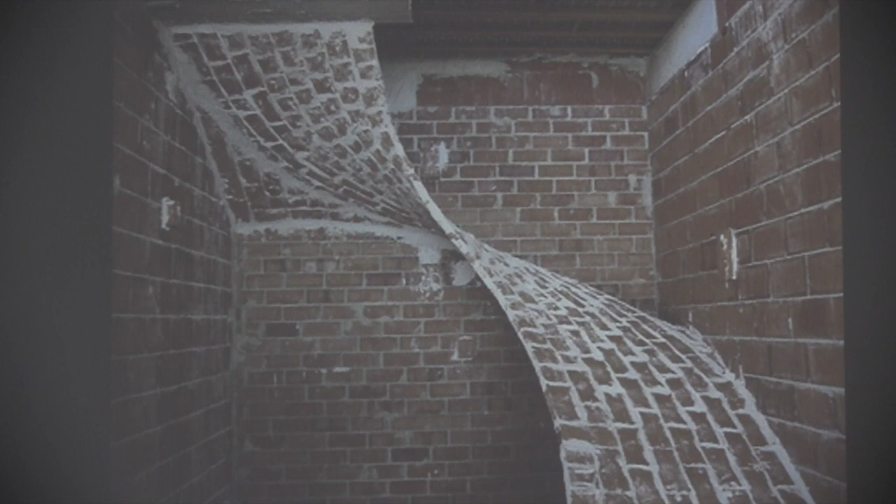This is an example of a vernacular house. We'll see this example here for some stairs in the construction process. Extremely resistant and stable vaults with barely any thickness. Once again, we witness the evolution of a system that is cheap and extremely low-tech. Here we're seeing some of the examples. This is the National Museum of Industry near Barcelona. And these are more contemporary exercises with the same approach.

Early on, at the turn of the 20th century, a master like Antoni Gaudí was working with the trencadís. The trencadís is a colorful and decorative pattern made out of recycled ceramic pieces that resulted in a cheap and colorful finish in his architecture, including sometimes in buildings for the aristocracy of Barcelona, like the Milà house.

Gaudí was a key architect of modernism in Spain, and his care for the details, the rich use of the materials, the almost impossible array of forms and colors are quite visible in the way his works were finished with these patterns of irregular and colorful ceramic pieces. The trencadís was very often taken from residual pieces or remnants of other works, and it became very popular with Gaudí, but it certainly belonged to a centenary tradition in most areas of Catalonia, Valencia on this coast, and the Balearic Islands in the Mediterranean.

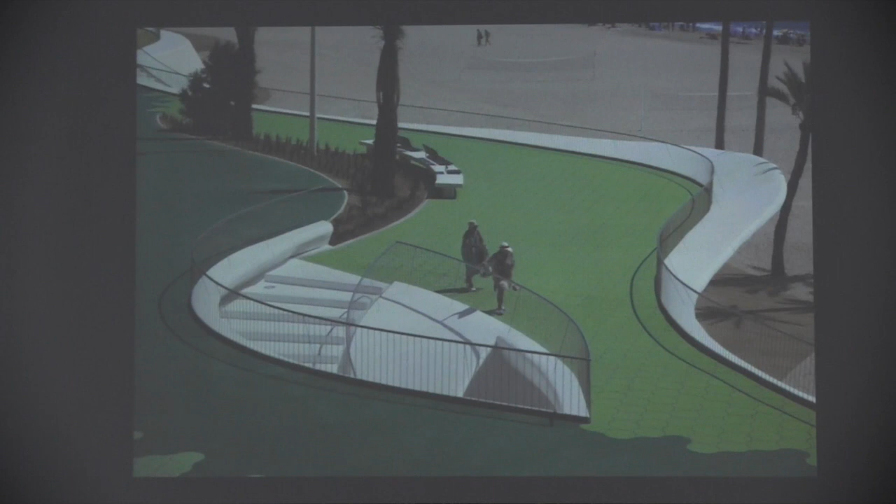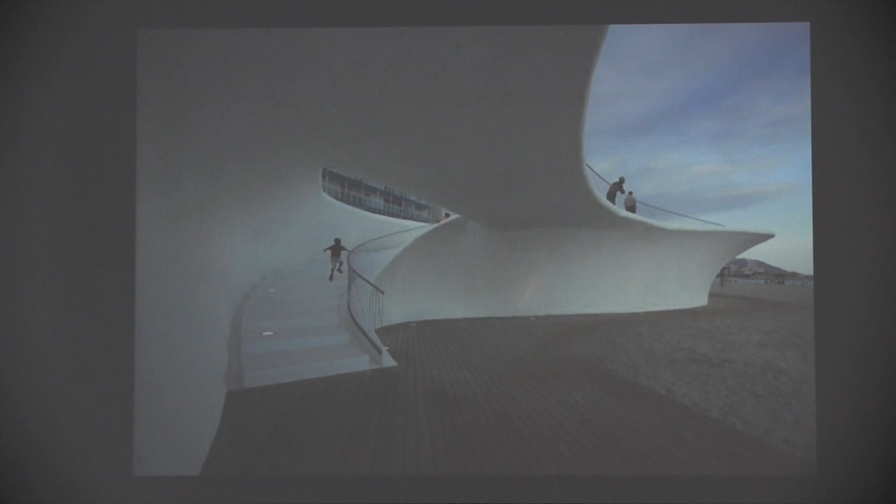The concrete retaining walls were inspired by the dunes of the sandy beaches, and along its changing landscape, a series of complementary functions, like accesses to the beach, seating areas, bicycle parkings, showers, etc., were organized. The use of the colorful ceramic pavements along the intervention recreated an artificial landscape that confronts the natural one of the beach.

In the second category, the category of artistic approach, I would like to show a very particular piece that can be considered very relevant, a space halfway between art and architecture. You probably know Barceló, the artist born in Mallorca. He was asked in 2007 to design a proposal for the interior of one of the main chapels of the Gothic cathedral of Palma de Mallorca in Spain, the Balearic Islands.

Such a big commission was not new to one of the most extraordinary architectural pieces of the Gothic period in the island, because the cathedral is very particular: it contains a number of collaborations, like this sort of floating element on top of the main altar made by Gaudí himself.

Miquel Barceló proposed a dramatic 3,000 square feet ceramic solution for one of the lateral chapels that represented parts of the parable of the loaves and fish from the Christian gospel. What he did is to wrap the entire Gothic space with this permanent installation that is completely narrative in the way he explained this parable.

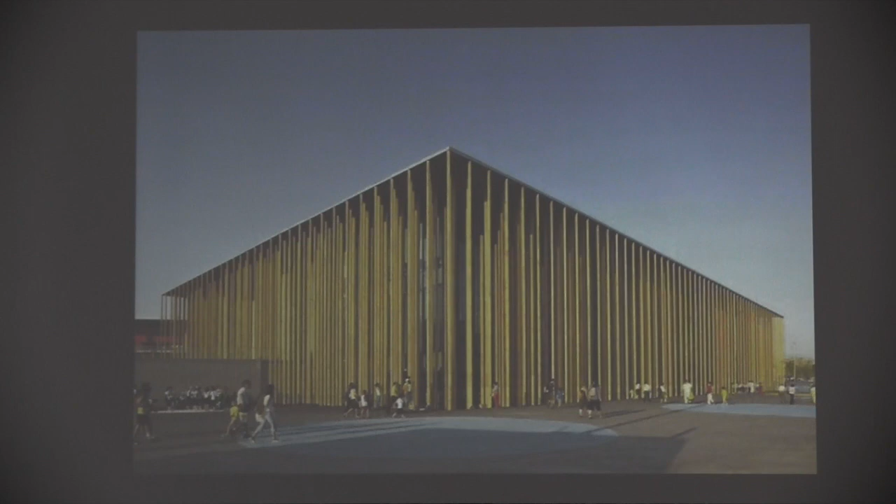And finally, the Spanish Pavilion in the Expo 2008 in Zaragoza, in Spain, by Patxi Mangado. You probably know this building as it's been published very thoroughly. The building was organized as a basic container with a surrounding forest of columns that were entirely cladded in a ceramic skin. The main idea was to create some sort of hypostyle perimeter, a buffer zone that would hide the glass box inside, again, from direct sunlight. Here we have the plan.

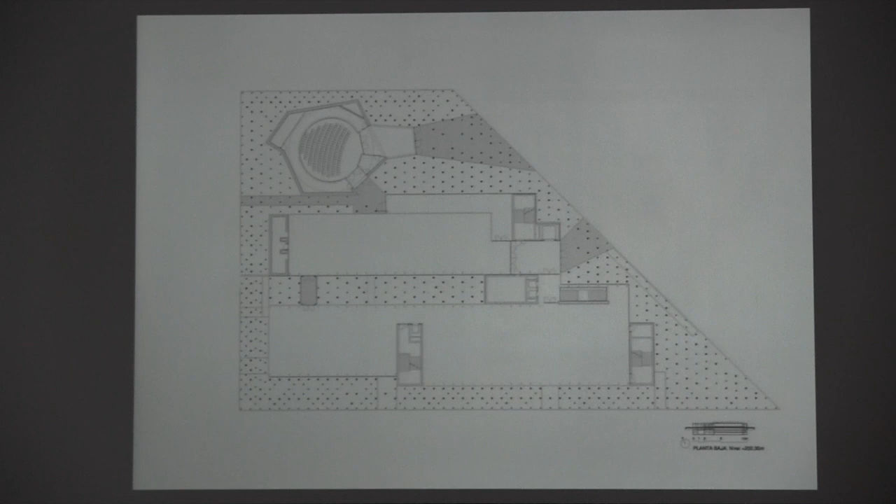Besides this, some of the areas outside, especially those where visitors would have to line up to enter the building, had columns interacting with water to favor the evaporation process and therefore cool down the temperature near the building. This approach happened to be a success, and the building stands today as one of the most celebrated projects of the Expo and also of Mangado's career.

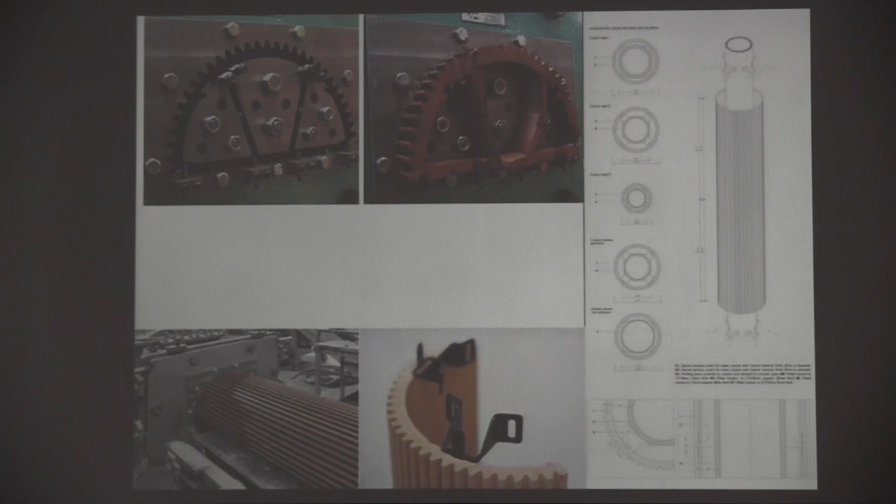I would like to conclude this quick overview with a praise of the ceramic material, because it belongs to the past, but it also belongs to the present. I have tried to illustrate very quickly that it's also possible to make it part of the future, as ceramic solutions bring the possibility of working with an inexpensive material that has infinite possibilities, whose application today, more than ever, makes special sense, as it seems to be a perfect material for where tradition and sustainability can be combined with a contemporary abstraction and a sustainable approach to the way we use energy.

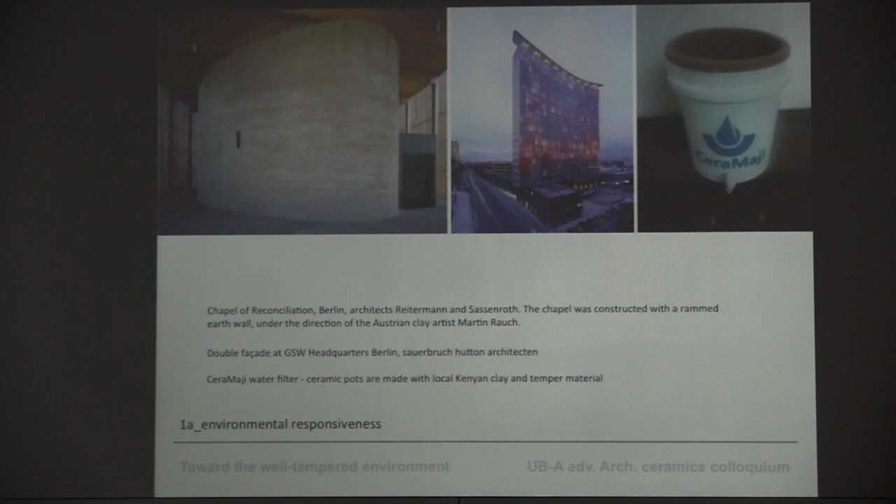Environmental responsiveness played a great deal in the formation of this project. The references I would bring up are three things in relation to architecture. One is the Chapel of Reconciliation, done by an architect named Peter Sassenroth. He turned a very small budget into a very beautiful building, I think. It is essentially a rammed earth composition made up of the remnants of a cathedral that was blown up. It had sat in the space between the walls.

The building in the center is one that I spent many years working on in Berlin. It's called the GSW headquarters. This building was like a machine for moving air, if you like. It was very finely calibrated to natural air movement, and in a sense there's a kind of correlation with the way this project moved.

The third one was a very small kind of almost detail, if you like, but a water filter designed for townships in Kenya. This was actually done at the University of Alberta in the medical faculty, and they discovered a solution of using colloidal silver as an antibacterial agent, which would allow that water filter a life of about fifteen years. And more importantly, it actually started an industry. So this idea that you can seed an industry, I think, is a very interesting idea. It's a great thing.

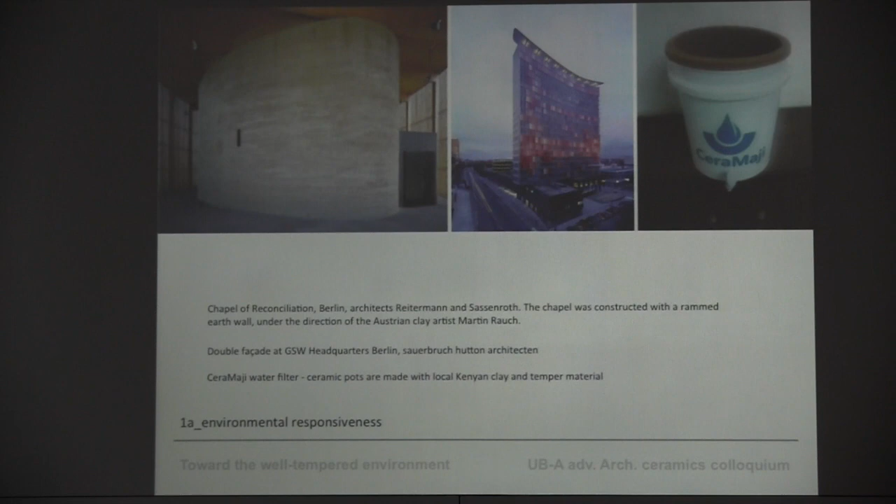So, moisture flow through assemblies. This idea that every building, or every building material, would have a perm rating - that we actually analyze an assembly on how moisture penetrates through it. It's very interesting to look at the positioning of vapor barriers, or the types of vapor barriers, in building assemblies. And that was one of our starting points.

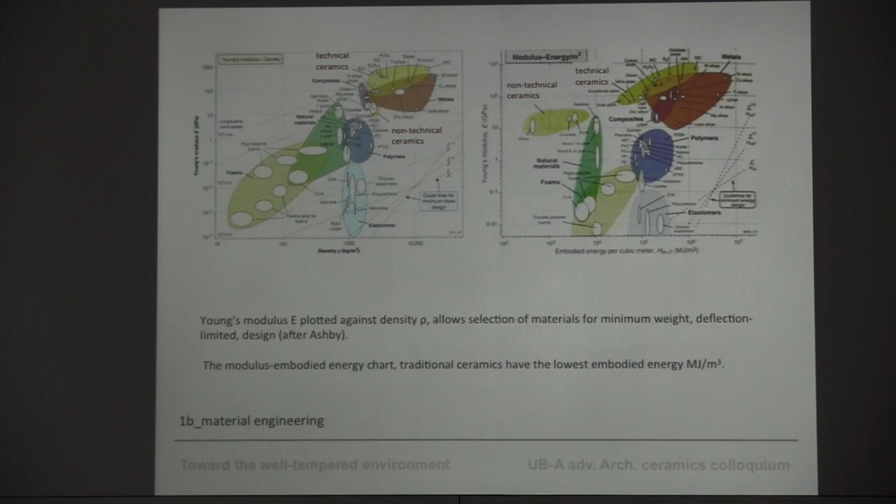This leads me back to Kevin Plucknett. We started our investigations actually in his labs. This was done at a micron scale. This chart on the right-hand side shows a basic idea of the scale that's happening. What's quite interesting is around nanometer and up to micrometer—this is actually where ceramics seems to have its most relevant properties. So we're talking about strength, toughness, friction and wear, and then we get into this idea of strength, electrical, thermal, and optical properties. So this is all happening at a very small scale, and fortunately for us, Kevin had done a lot of work at that scale.

A lot of the early experimentation was just to see if there was a way to find a gradation in a material sample, and then to see how much porosity would be in that material sample. This was done with small discs, which were both fired and then tested in a laboratory environment. The great thing about this was that he had tools, like the scanning electron microscope, to actually see the results, which is something that wasn't normally available to us.

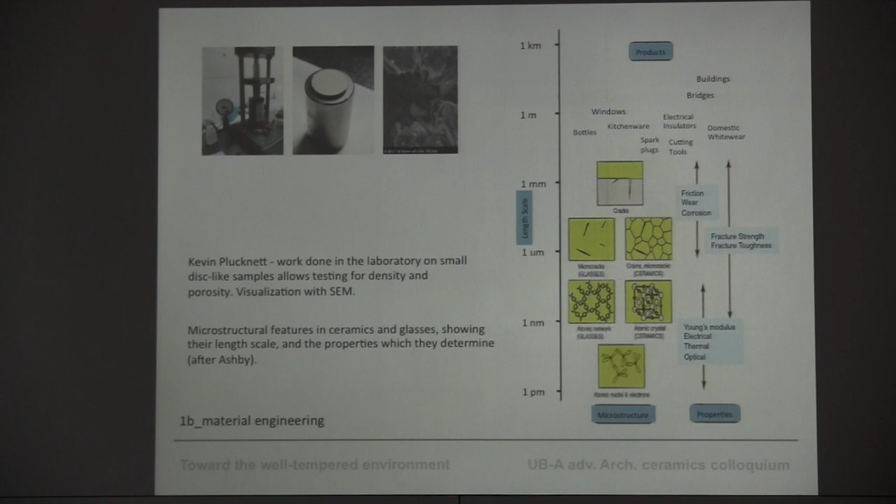I'd just like to talk about Rory for a moment. Rory Macdonald is coming from a completely different direction. He was talking to us a lot about in situ installations, and this idea that a dumpster could be a kiln, I thought was fascinating. This is almost like a street style ceramics, if you like—somebody who's very aware of what's going on. What attracted me a lot to Rory was this idea of the portable kiln, on the far right at the top. He's made a kiln that you can actually take and install on site and then fire a piece of ceramics anywhere you like.

The main concept that Rory was talking about was an idea of multiple material states. So it was asking us to imagine an architecture that embodied both a material in its green state and a material perhaps in its finished state, and what kind of resulting interactions would happen.

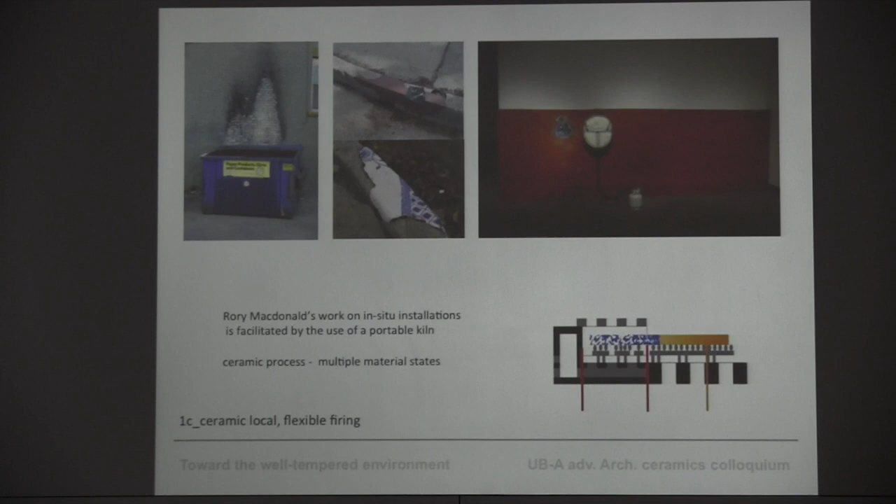We then looked around a little bit, and maybe we went to Spain. I wish we'd gone to this building, but it's certainly on the list. A very interesting architect, Enric Ruiz-Geli, I think. He's designed a home for himself, Villa Nurbs, outside of Barcelona, and it's been a long, slow process, but he's very fascinated with computation—what we can do with parametric scripting. In the upper left-hand corner, coming out of a fairly complicated geometry, are all the ceramic tiles that would be needed to cover that surface. These ceramic tiles are divided into color spectrums, and each one has a particular role to play in terms of opacity, and also as a kind of heat deflector sheet.

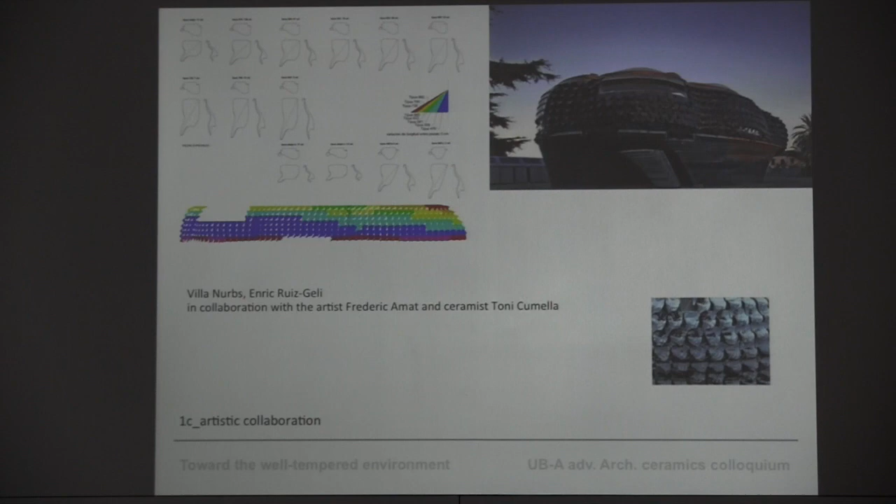The interesting part here is working with an artist named Amat in ceramics. I'm not sure how well you can see this, but each one of these tiles is individually finished with a patterning on it. So we took that as a kind of reference point.

For ourselves, the project developed along the idea that if we start with this humid maritime condition, could we develop a tile that could take on many roles within that one wall? We were thinking about a situation where you'd be absorbing energy from the inside, and you would also be working with moisture or humidity from the other side.

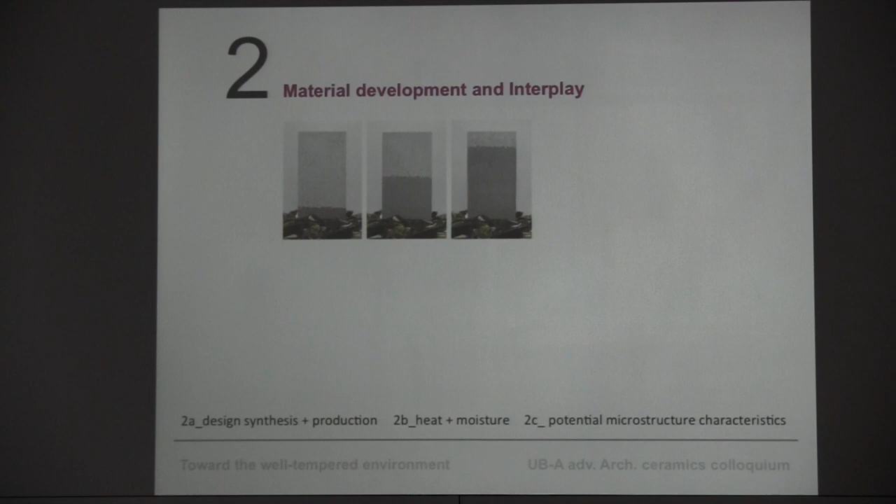So in terms of the multi-material state, what we came up with was an idea of a number of frames that were fired. We went through a number of prototypes, but in this section here in the lower left, this was the idea that we would have a frame, and then we would have a fill, and that fill would be a green clay.

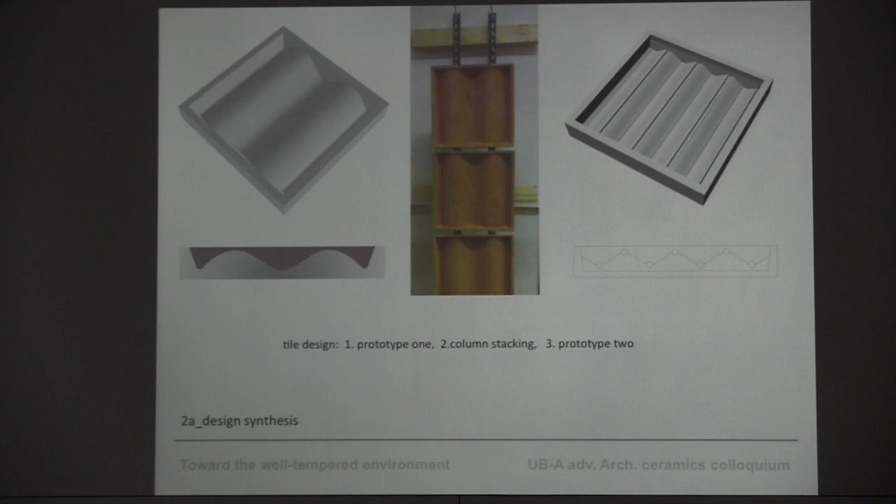So we're working with two different ideas. One is, could we have a kind of positive interlock and interaction between two types of clay? And secondly, what would happen if we introduced channels to simulate a draining or a path for moisture or air through that panel? And lastly, there was an idea of what happens on the surface and how we handle water on the surface. So we started looking at a number of different powdering techniques for the surface energy.

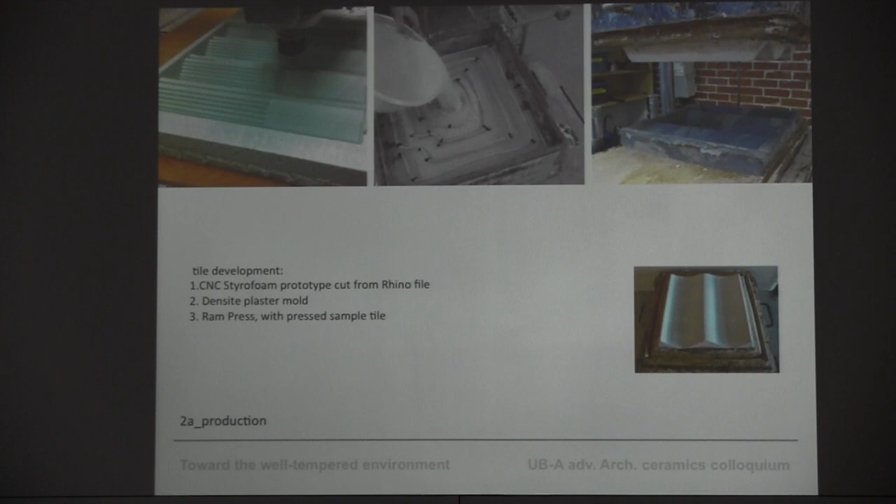Setting up a Densite mold is very interesting because it starts as something that is apparently dry, and then the forced air within that mold actually forces the moisture out. It happens very rapidly, but for our way of thinking, that started to illuminate this idea that the material itself is actually a web of voids. It's interesting because it starts as almost little bits of wispy humidity, and it turns into cooling to the point where that water actually flows right off the material.

With these frames, we have the use of a number of very sophisticated kilns, with computational control over temperature and airflow over time. This represents a weekend of firing.

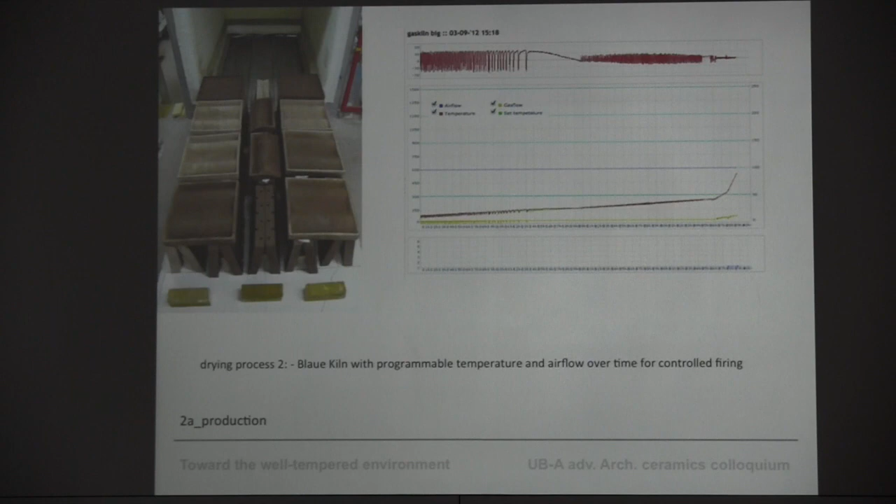At the same time, we were trying to develop a computational model based on FlowNet, which is normally used to model aquifers, to see if we could start to understand how water may move through that material.

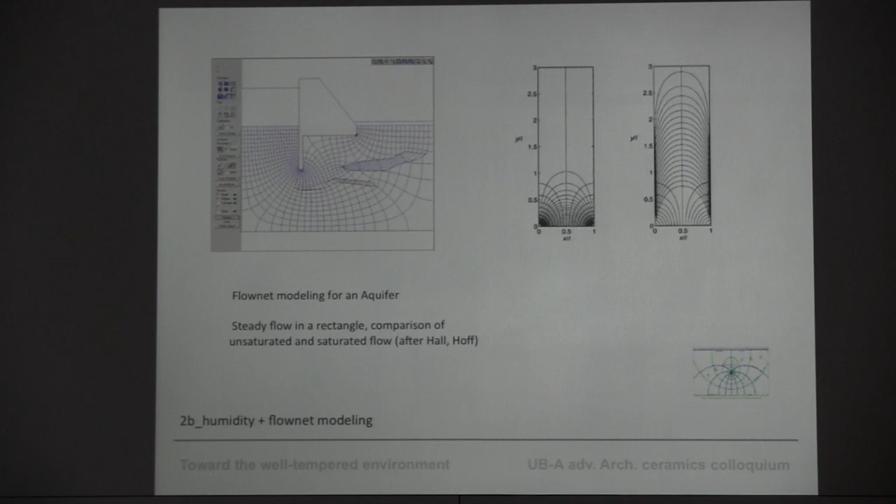In homage to another one of the potential participants here, we also started to look at bentonite and this idea of the humidity flywheel, which Bill Carney can speak at length on, not so much me. But we also became very interested in other tiling types.

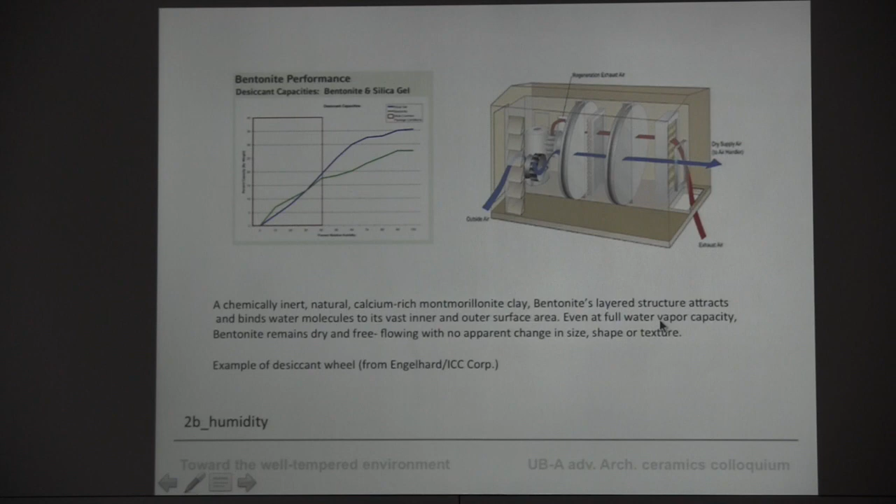So would anybody recognize this? Okay, tell us what it is, Omar. That's the shuttle, it's the space shuttle. And this is probably the most high-tech of all ceramic facade systems.

It's an idea of a material that has a thermal insulating characteristic by decreasing its conductivity. It's a solid matrix, and there's actually a gas within its pores. It's a good insulation property achieved due to very small thermal conductivity in gases compared to solids.

In terms of the actual construction, the piece itself is maybe not that interesting because it literally looks like a block of styrofoam. But then it has two or three different characteristics. You can see on the edges of the wings, obviously, the need for more resistance.

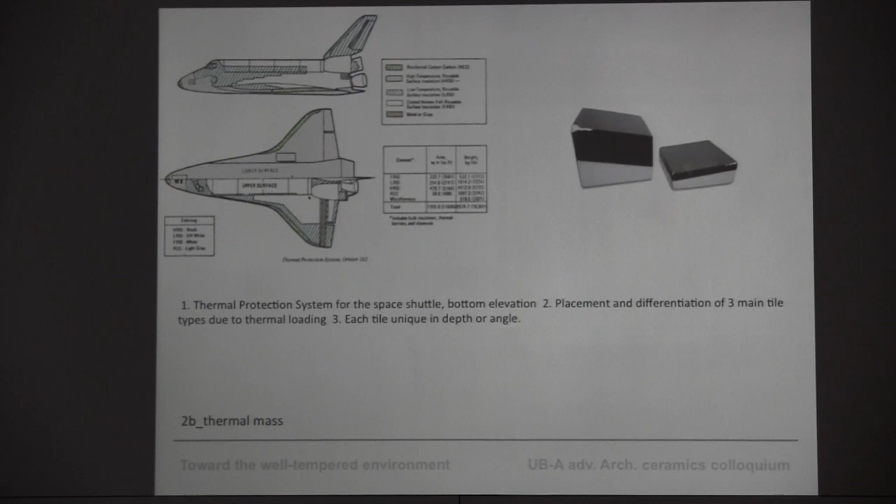So to contrast the high-tech idea with a low-tech idea, we also looked at the work of Hassan Fathy, and this idea that there's a whole belt in the world that have traditionally developed ceramic knowledge, or let's say earthen building knowledge.

What Fathy's experiments really showed, you can see the dotted line on the top, is really the idea of the well-tempered environment. This is a comparison of indoor and outdoor temperature with the idea of time lag, so that the material would absorb the heat during the day and give it back at night. Compare that to the chart at the bottom, using prefabricated concrete slabs, where there's more of an imbalance - the temperature spikes and does not release in the same well-modulated way as the material in the top sample.

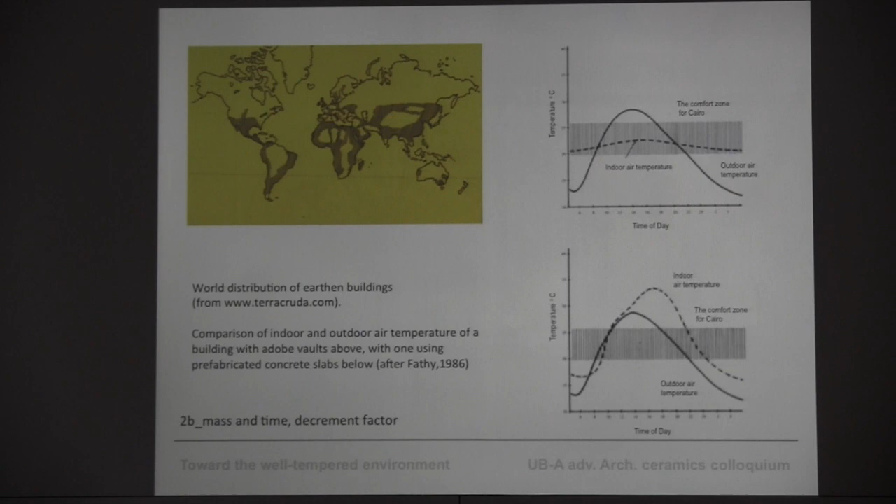So this led us to another experiment - an idea of partial firing of clay.

This is an experiment from Kevin Bucknell, I'm not actually sure about it. What we're looking at here is two examples of clay that have been done in very similar manners - an example of porosity that's done through partial firing.

So the one on the left, fired at 1200 degrees Fahrenheit, the water from the pipette just sits on the surface, whereas the one on the right would absorb it completely. And that's only with a 100 degree difference in this scale of firing temperatures.

The second aspect, when we start to examine the block, was this idea of directionality. For pore directionality, this is something that we're working on right at this moment.

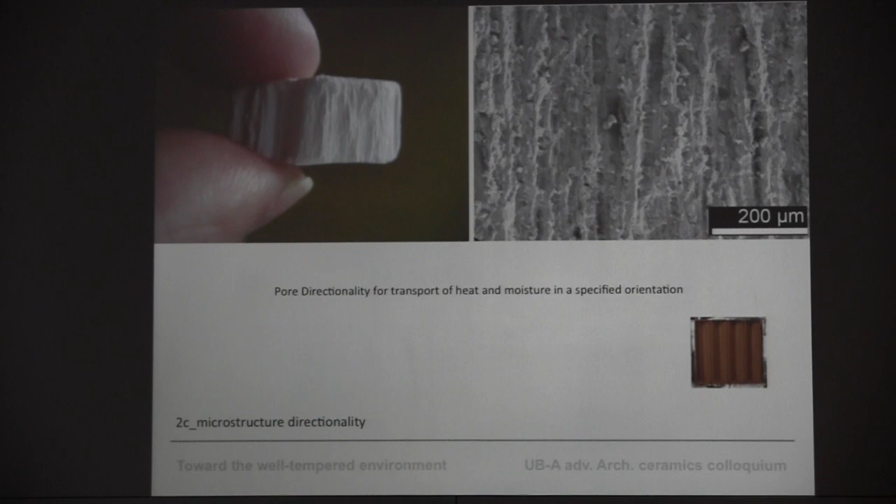So we thought that was very good, and in a way, if the first sample I showed you was about being a sponge and being able to absorb, then this was a means of directing excess water or excess moisture out of the material.

The third property that we were looking at was insulation. Here we've started to look at ceramic glass composites. This is like a foam, or a closed cell to open cell transition.

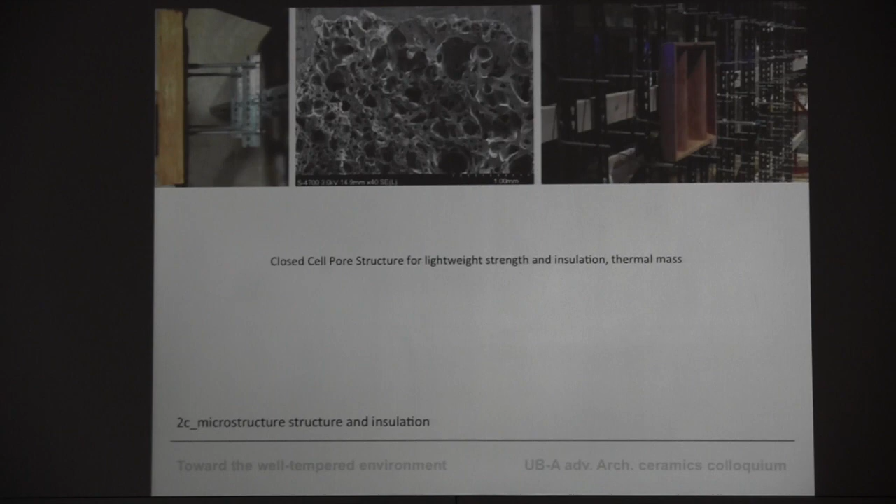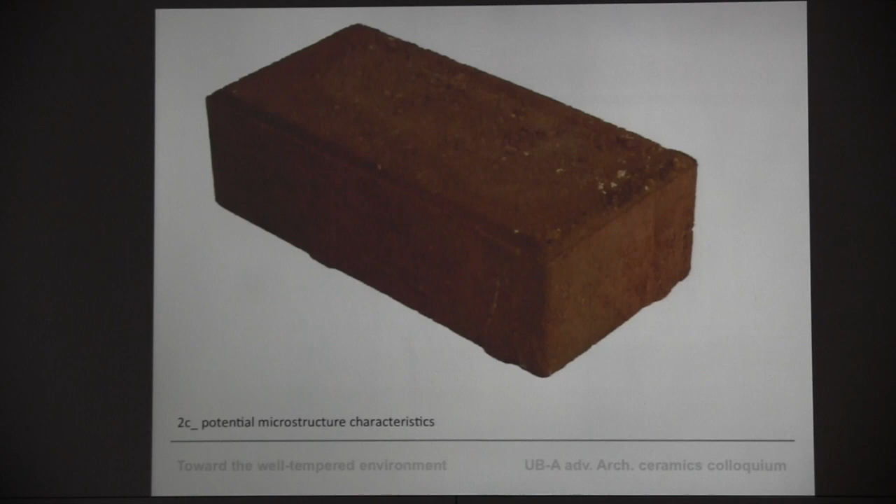So in a way, what we've done is done some work in the laboratory, getting it toward a series of attributes that we'd like to see, and then we tried to test that with an analog. But where it's going, we considered was to be able to take a standard brick like this and give it material properties that one could adjust to the climate and the situation that you're in.

So in the first case, nonlinear porosity, this would be the sponge effect. Secondly would be this idea of directional porosity, which would allow the brick to breathe, or you could actually move moisture or heat in a certain direction. And the third would be the idea of closed cell foam, good for absorbing heat and at the same time excellent as a structural characteristic.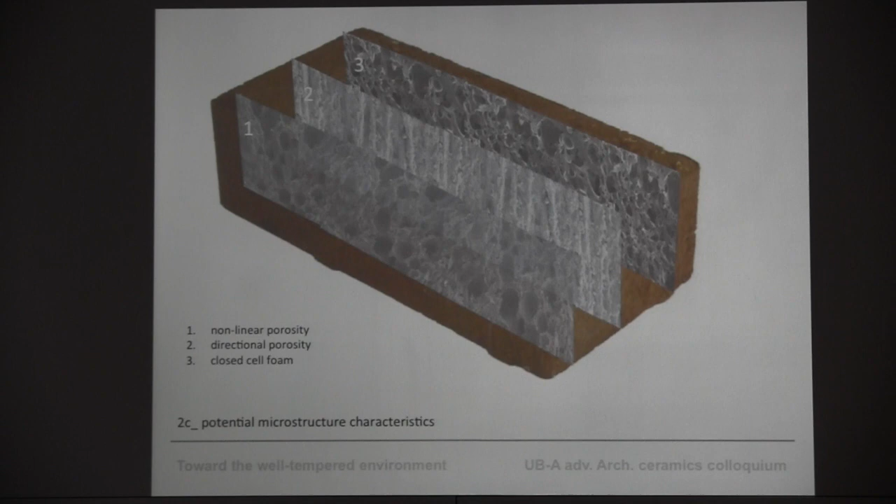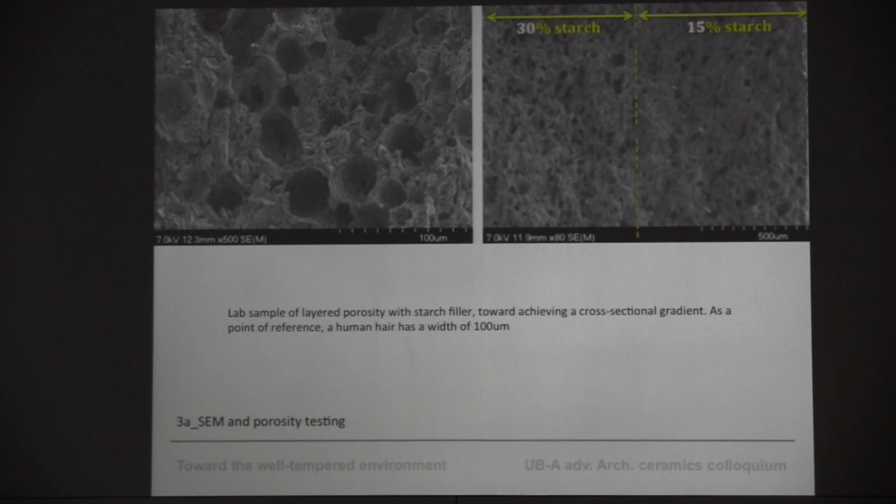So I've got a few slides here on the testing we've done. I'll go through that a bit more quickly, perhaps. This was the use of a starch filler that we used as a burnout material, which actually allows some gradient to start occurring in the materiality.

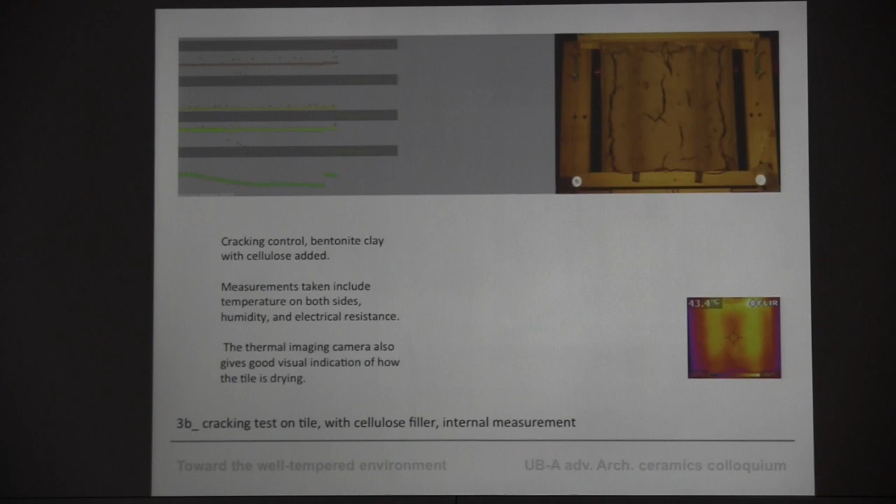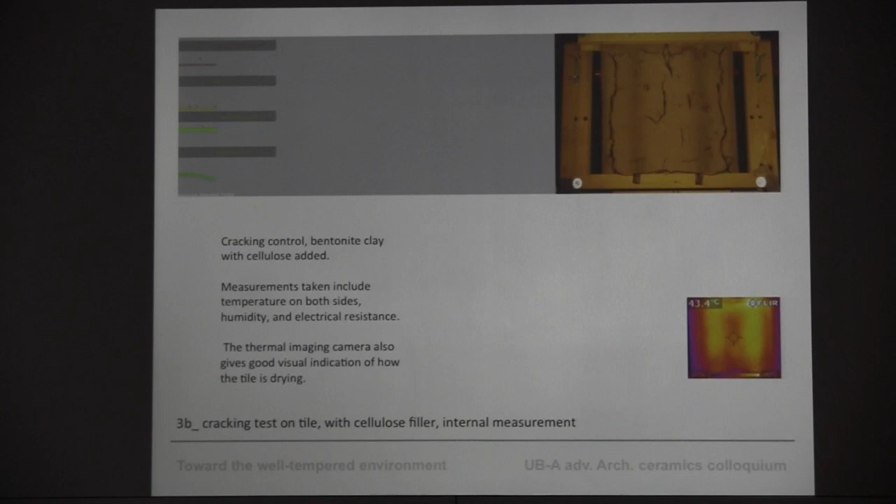This is a time lapse of a dedicated drying process we were working on that was measuring temperature, humidity, and moisture content through that tile. With the green clay it was very difficult because it just wants to crack, and we did a lot of experiments actually embedding sensors right into those tiles to see what was happening.

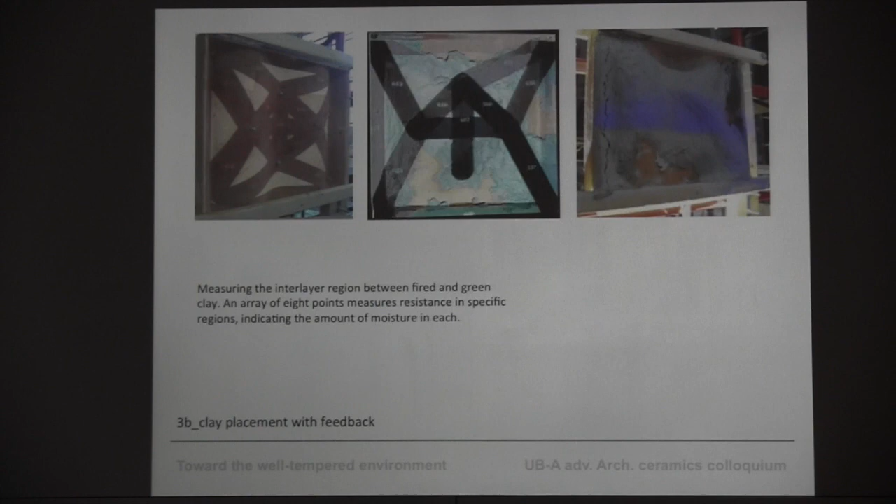And at the end of the day, what we had done is run 5 experiments, 5 different wall conditions, that allowed us to start to suss out what the interactions were.

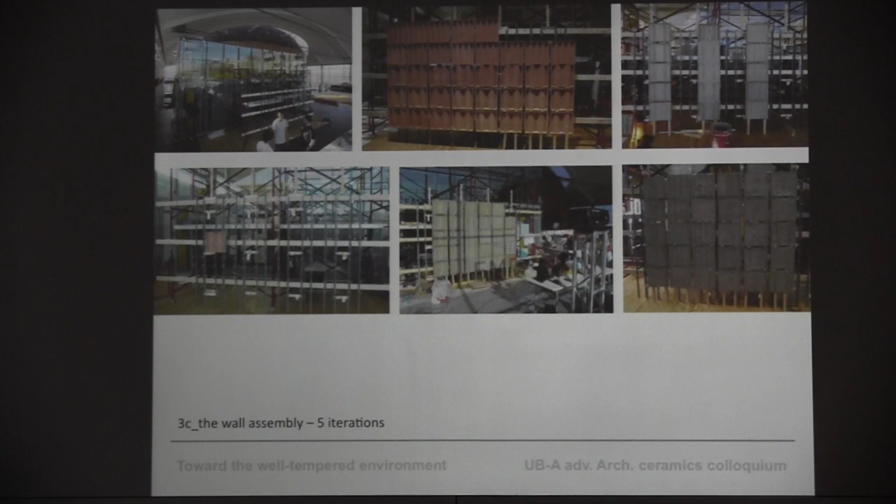This was actually achieved on that framework in the upper left-hand corner. There's a set of 16 sensors, I think, equally distributed across that wall. And then over time, we were measuring, say, either heat or moisture, and in one case combined, what was happening in that wall.

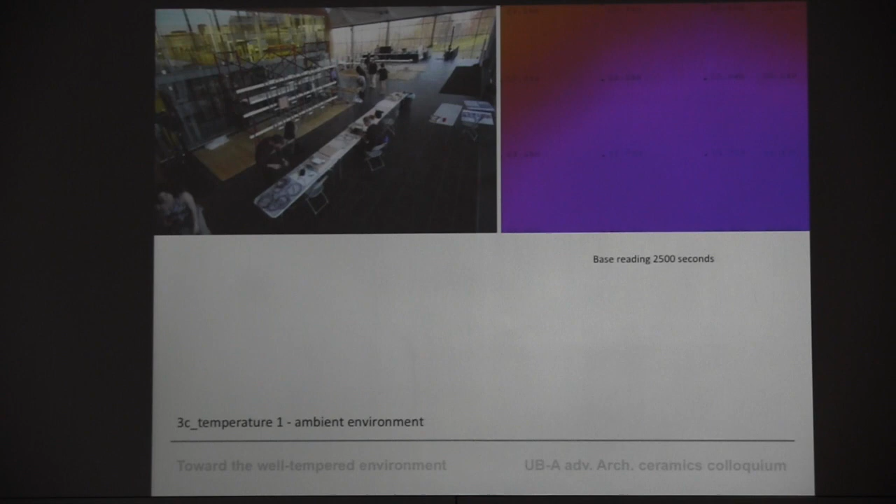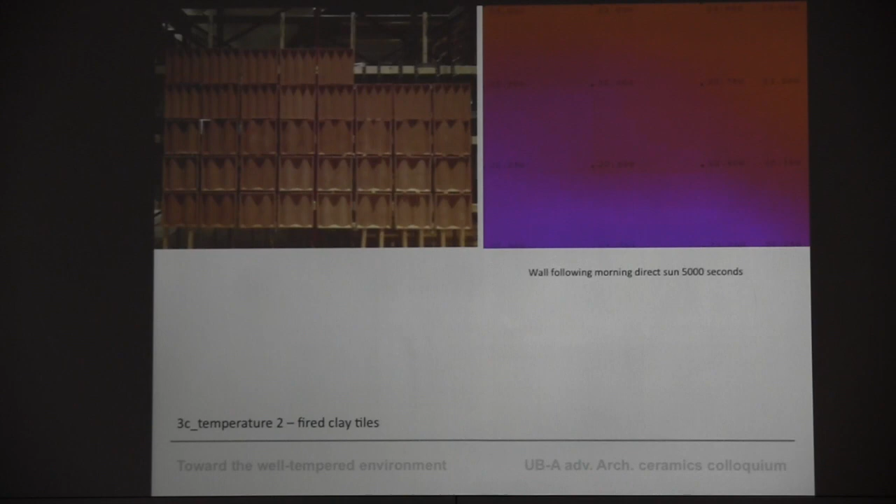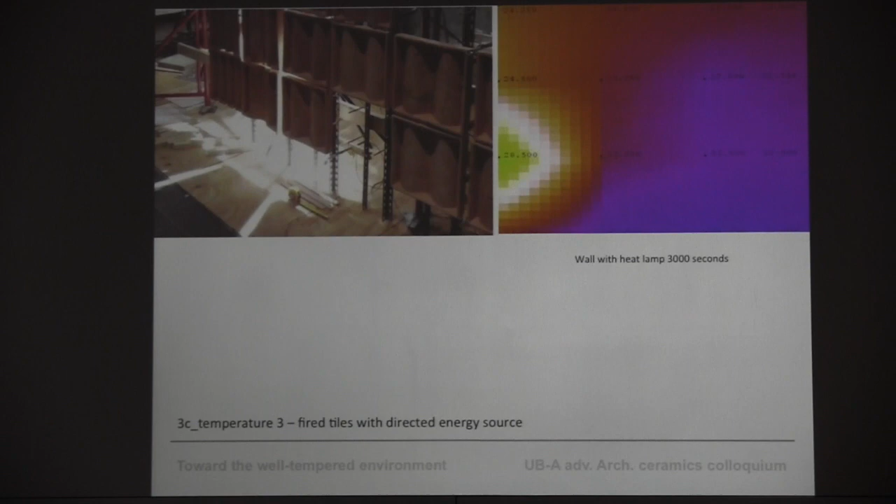So this usually gives you a table of numbers that you probably know if you've done any sensoring work. We started with just the frame itself, and then we started using artificial inputs, in this case a heat lamp to replicate temperature, and spray to represent moisture.

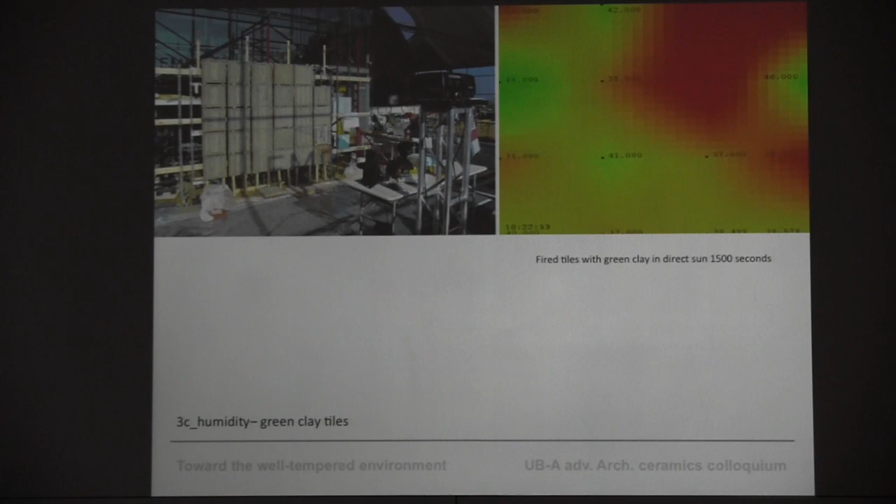This is early green clay. And then this is starting to look at the moisture within the green clay. And this is the combined reading.

So a lot of that had to do with developing this idea of how one visualizes it. We were very concerned with taking the idea of, say, temperature and humidity readings and finding a way to clearly represent that back to ourselves and hopefully to others.

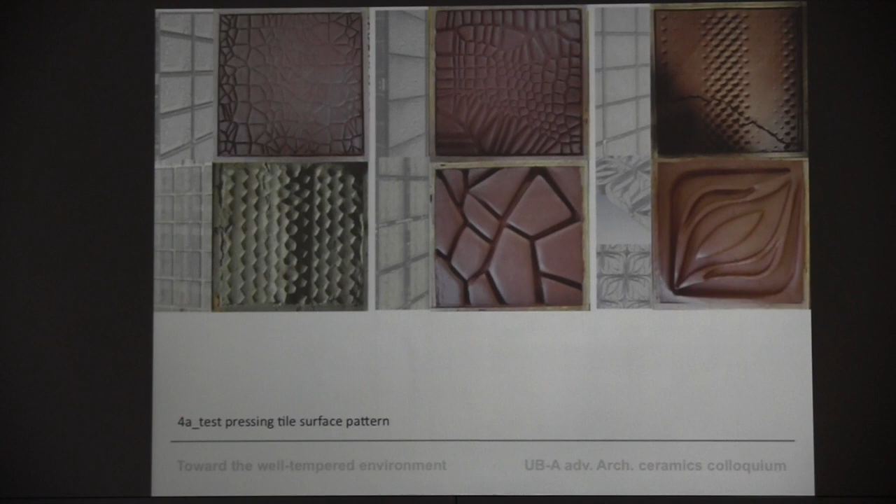So, work done on the surface. We also did a series of exploratory panels developing surface patterns. We used Grasshopper quite a bit. In feedback, we started to look at changes within our monitoring system, our feedback system, using vectors to start to indicate direction over time.

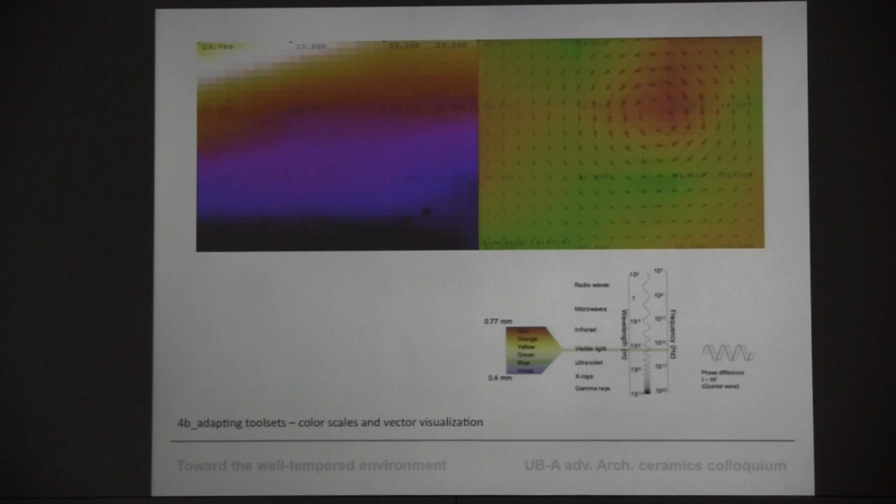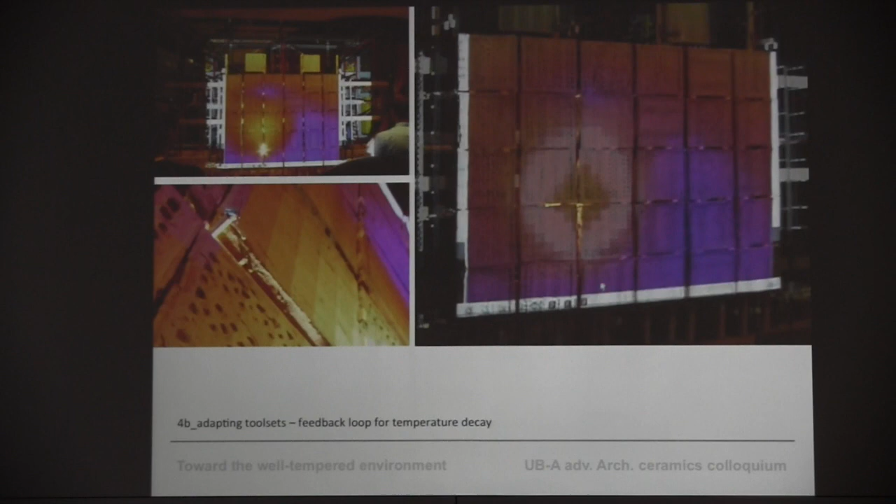This was very interesting. At the end of the day, I think what I remember most, or what has the most potential, is this idea of real-time feedback in a wall. If you have a sensor system and a series of inputs onto that wall, then over time—this was actual decay, that light source had been turned off, but you could actually watch that decay as it was happening. It's a little speeded up, but the idea was that you could watch that wall condition change, watch the moisture penetrate through different directions, if you like.

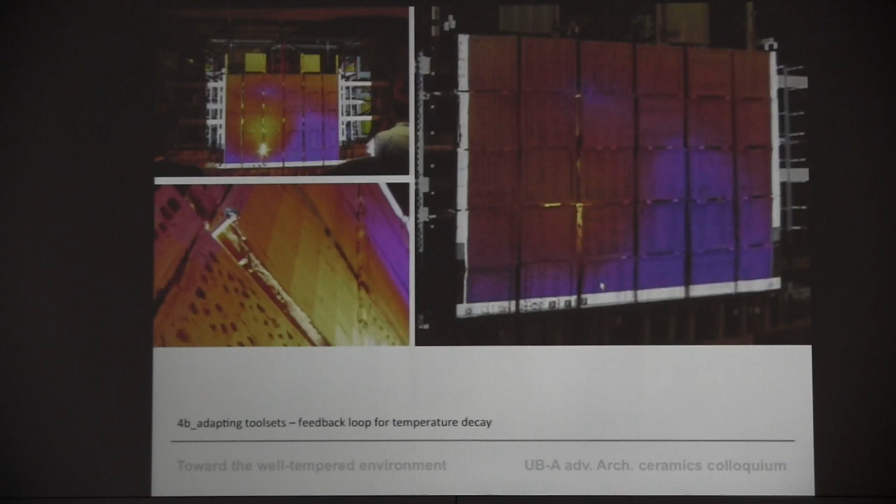So this idea of bentonite was actually very difficult to work with. We've got some ideas of how we'd like to move forward with that.

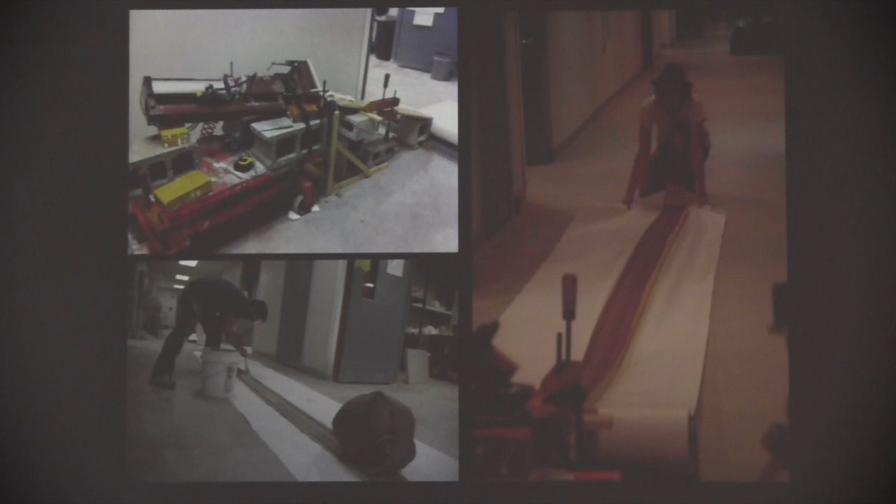Okay. So, for a couple of years, I worked at residential remodel. Construction was constantly reformatting pieces of lath and plaster into these dense sort of trash cans before they go away, and I got really interested in that. And here you can see basically what I did was extrude the perimeter of that whole gallery space in three separate pieces that then were rolled back on themselves and placed next to the wall that they were associated with. So this is a 32-foot-long piece of baseboard clay that was wrapped up and positioned next to its wall.